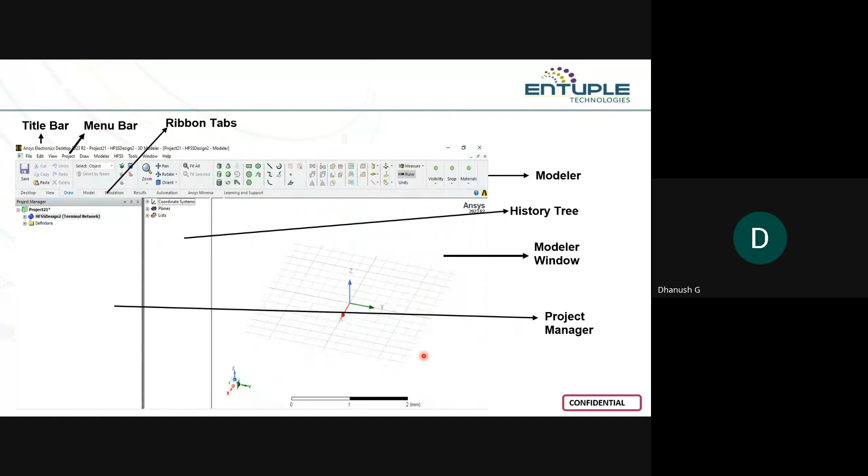This is the Cartesian coordinate system we are using for designing in HFSS. We have three types of coordinate systems, but in this workspace you can see the Cartesian coordinate system.

This is how to create a 2D structure. Coming to hands-on, I'll be showcasing how to create a 2D structure and a 3D structure.

Just click on draw, then you can see the 2D structures—rectangular, circular. These are the 2D structures. We can select from the modeler itself, or you can select from the draw menu. Above the modeler you can see the draw option, right there you can select these options. Otherwise you can select from this modeler option.

I'll be showcasing how to create this rectangle once we enter the hands-on.

Then this is entirely 3D objects. Here just you can click and place into the workspace, then you can see the 3D structures—entire 3D structures there.

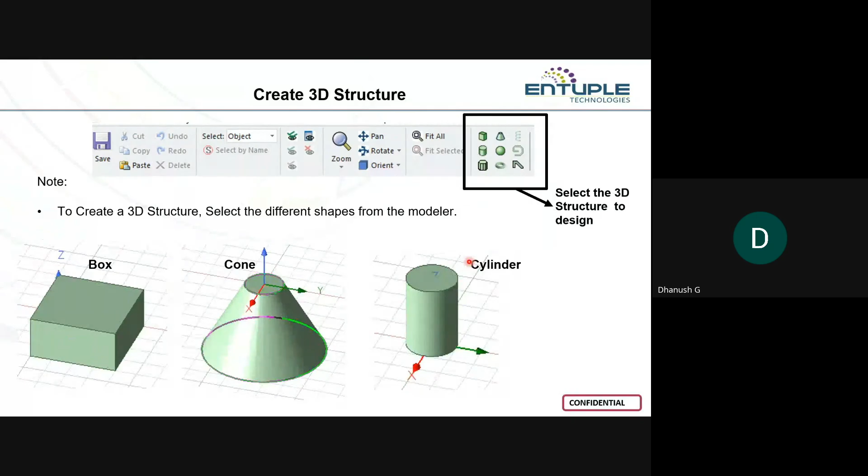Next, you have a very good option in ANSYS HFSS. All users of ANSYS HFSS will know this option—hide selected object in active view, or show selected object in active view.

You can explore these conditions when you are designing very large structures, array structures, phase arrays, or any metamaterial structures. For that time you can use hide selected objects or show selected objects. You can use all these options to create a better design.

First you can see show all objects in active view. You can click this to see all objects active in the workspace. For example, if you create any sphere, any circle, or any 3D substrate, everything will be visualized after clicking this.

If you want to hide something—hide meaning it's not deleted, just hidden—select the structure, like this box, then click hide, and it will be hidden. If you want to visualize it again, you can click this 'show all' option to visualize all hidden objects. This option lets you select only the show-only-selected-object-in-active-view function.

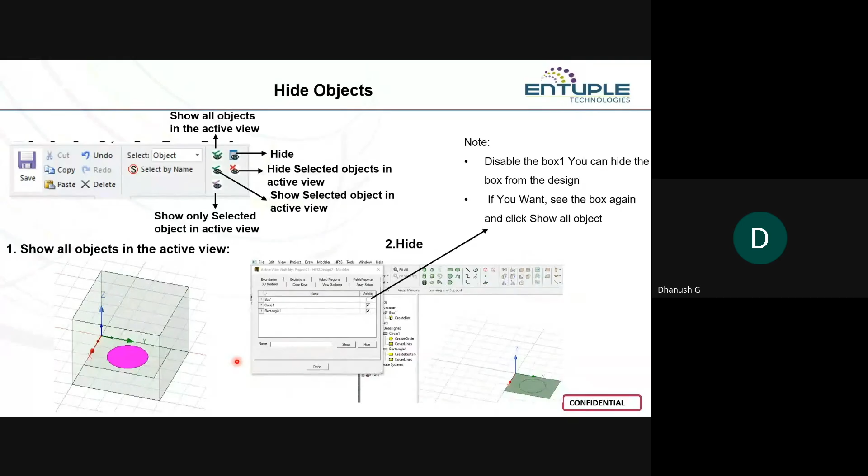You can select one object, then click this option, and you can visualize only that object—others will be hidden, meaning other objects will be hidden. This is what I'll be explaining.

Next, we have the select option. There, if you want to select the entire face, edges, a vertex, or multiple vertices.

We use this option when, for example, you want to assign a boundary condition for all objects—that time you can go with select object all. Just click this, and the entire object will be selected.

When you click face—when you are assigning a unit cell concept, for example, if you want to assign a primary-secondary boundary condition, what we call master and slave—you need to click this face option to assign those kinds of boundary conditions.

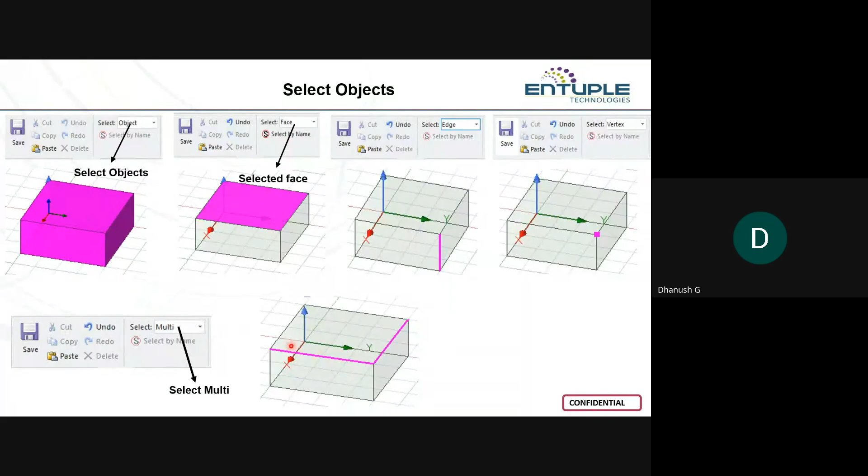If you want to do a chamfer or a truncation, that time you can go with edge and vertex, so you can do a chamfer or truncation. For multiple chamfers or truncations, you can go with the multiple option. This is the select object options available in ANSYS HFSS.

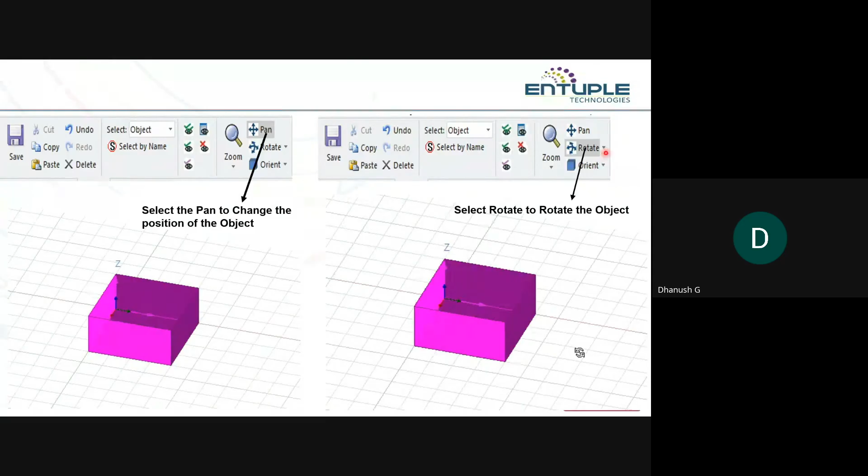Next, this is a pan. There you can change the entire position to change the position of an object for a better visualization. That time you can use this pan. Then you have a rotate option to rotate your design, and if you want to see the back or bottom of your design, that time you can use this rotate option.

Otherwise, we have another option called orient, where you can click just the bottom and directly it will come to the bottom. If you want to visualize all those things like the bottom side of the object, that time you can go with the rotate option. Next, we have an orient option. There you can see top, bottom.

If you want to see the top angle to assign like a port, a Floquet port or a lumped port, if you want to assign only for a top object, that time you can go with this orient option to select top, bottom, right, and all those six isometric views. Then you can go with this orient option.

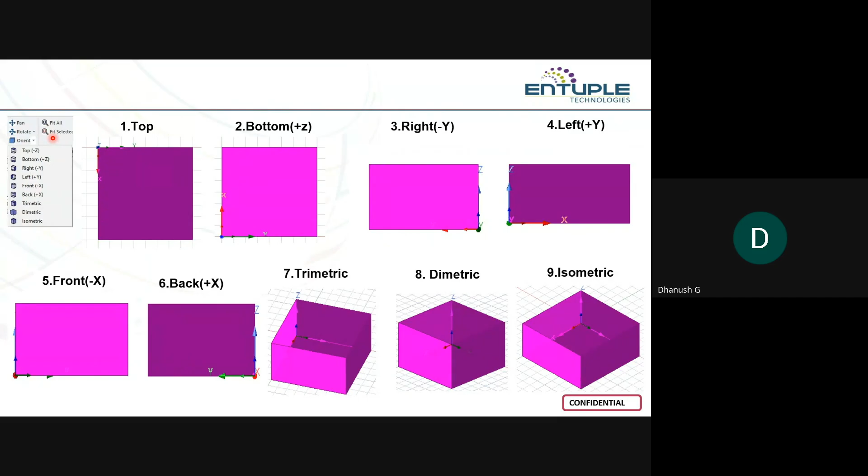Next, these are the shortcuts. Once you become more comfortable with ANSYS HFSS, you can use the shortcuts to fit view, zoom the screen in or out, drag or rotate it. Or if you want to see the wireframe or the entire smooth shaded models, or select faces with clicks itself, all those shortcuts are available. Using the shortcuts, if you consume more time, it will be reduced once you're more comfortable with hands-on.

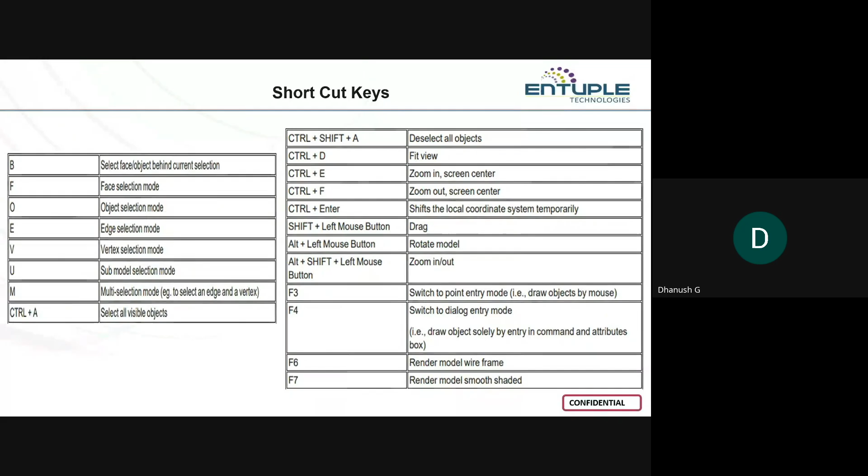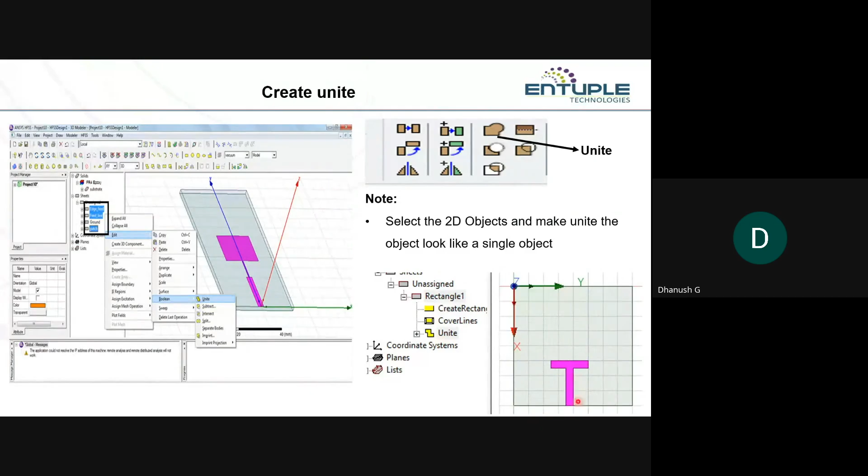This is the unite option. Why we use this unite option is to make all three different objects or components into one. It looks like one. If you want to create this T object, you need to use two rectangles. Then you can select those two rectangles and make that unite.

But that option you can use is this unite option. Next, you have subtract. There, if you want to remove some unwanted space between, or if you want to create a U slot or different slot antennas, then you can use this subtract option to subtract, remove that face, remove that entire space there.

Next, coming to project manager, what are the things you are able to see in a project manager? Coming to model, there you can see geometry structures. There you can create a structure and visualize those structures. Next, coming to boundary conditions, there you can visualize what boundary conditions you have assigned.

Hello. Yes, sir. You can continue.

Next, coming to boundaries, there you can visualize these boundary conditions. For example, if you want to assign a boundary condition to a ground object, then you can visualize the entire ground there. Then if you want to assign the entire complete box, you can visualize the box. All those things you can visualize using this project manager.

Then if you want to see the excitation, meaning the port, you can click on this excitation where it will be assigned. Next, coming to hybrid region, if you are doing any complex designs, then you can use this hybrid region to combine the solvers. For that, you can use this hybrid region.

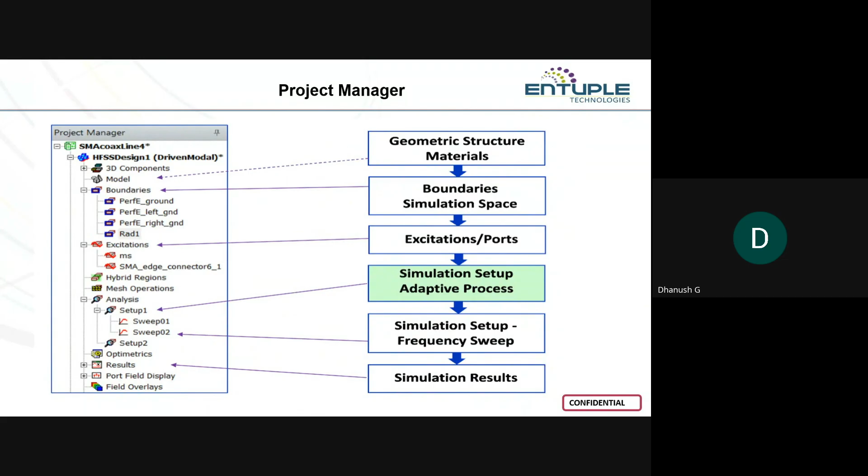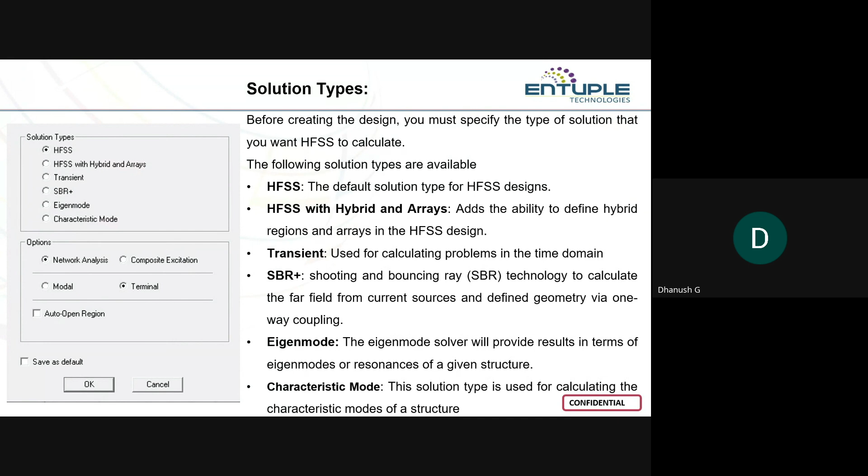Next, coming to eigenmode solvers - if you want results in the form of resonance for a given structure, you can go with eigenmode solvers. Next, we have characteristics mode - if you want to calculate the characteristics of a structure, you use characteristics mode. Next, we have network analysis and composite excitation. Network analysis is the default solution type option we use for normal designs. If you want to do very large complex designs, you can use composite excitation for solving over a large frequency range.

Okay, next, why we use the boundary conditions? What is the purpose of the boundary conditions? It will define the behavior of electromagnetic fields, whether it will be at edges or surfaces, or a computational domain, and it will ensure proper electromagnetic wave interaction within the simulation area.

For a Cartesian coordinate system, the dimension limit is minus infinity to plus infinity, right? For that purpose we'll be using this boundary condition, so it will be simulated inside that simulation area. For that purpose we'll be using these boundary conditions.

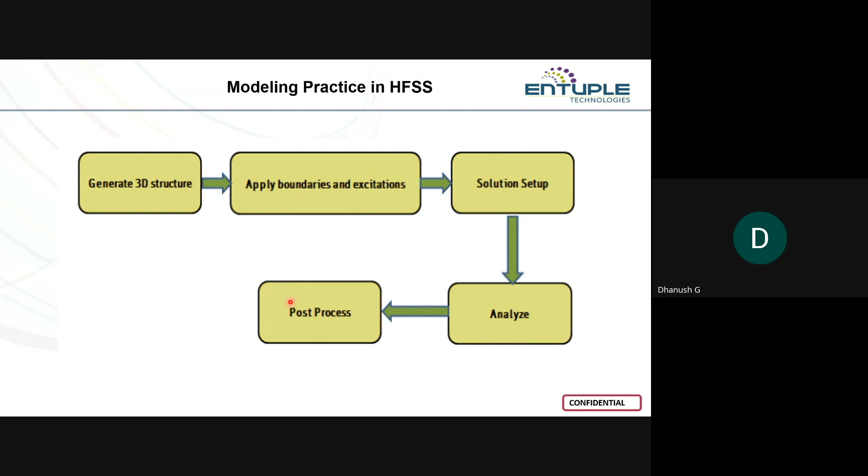After that, you can see post processing. In this post processing part, you can see results like S parameters or radiation pattern. All those things you can visualize in this post processing part. This is the modeling practice we follow in ANSYS HFSS.

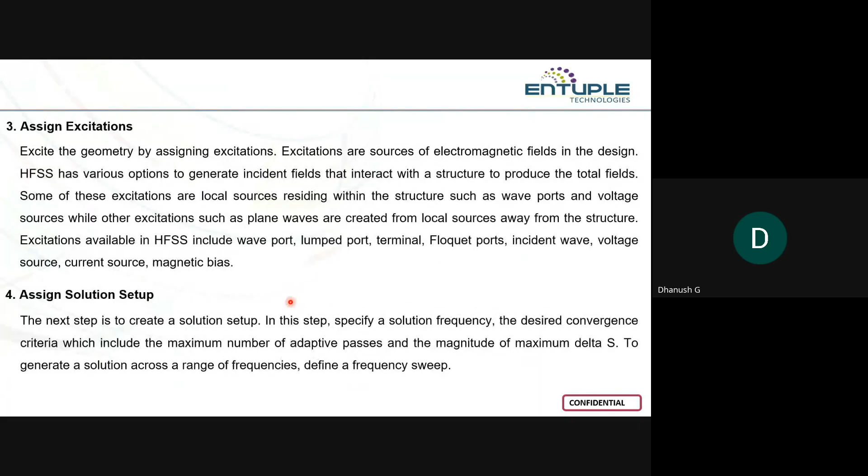Next, what I explained, how to create a geometry, boundary conditions, and excitation, solution setups, and validation analysis and post processing. I explained this process in the day before yesterday's session.

Next, how to create boundary conditions. If you want to assign boundary conditions, click the object, right click on the object, click assign boundary, next click perfect. We have so many options in it, like coupled boundary. If you want to create any unit cell concept, that time you can use this coupled boundary. Next, FE-BI boundaries.

If you want to do a hybrid analysis using FE-BI, that time you can go with this FE-BI boundary. Next, for conductivity, you can go with conductivity boundaries. If you want to do an impedance, then you can go for impedance boundaries. Next, coming to layered impedance or linked impedance.

Then coming to lumped RLC: if you create a structure and want to give values for those resistors or capacitors, that time you can use these lumped RLC boundaries. Next, if you want the entire structure to be a perfect electric conductor, you can use the perfect E boundary condition. If you want magnetic, then you can go with perfect H.

Then if you want radiation on the entire outer boundary, you can use this radiation boundary. Next, if you want PML boundaries, that option is also available; click on it and go further with the PML setup wizard. These are the boundary conditions available for your designs.

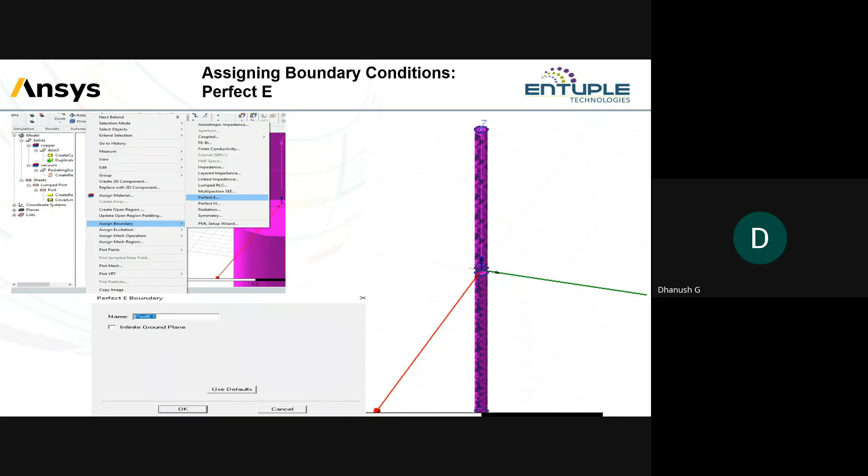Next, coming to excitations, how to create an excitation. For example, if you want to give current for this port, you can select this face, right click there and assign excitation. Then click port, and you can see the circuit port, Floquet port, lumped port, and wave port.

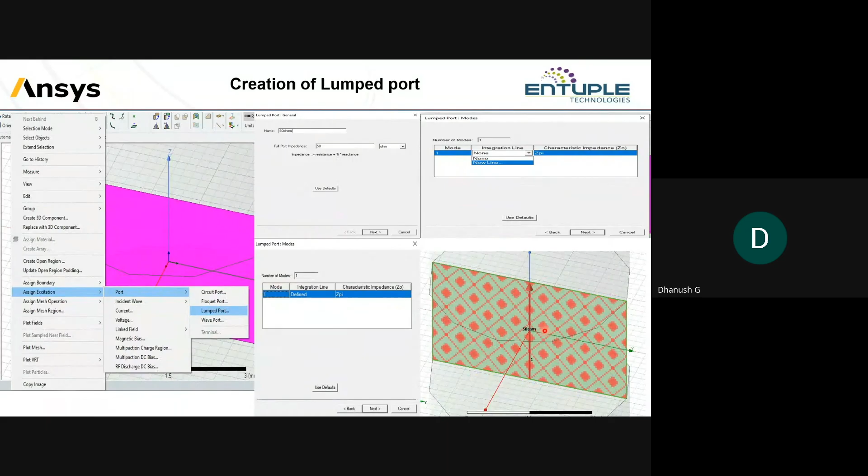If you are designing band pass filters kind of things, you can go with a wave port. If you are doing lumped port analysis, go with a lumped port. If you are going with any unit cell concept, you can go with a Floquet port. If you are using circuits like lumped RLCs, you can go with a circuit port. These are the excitations available in ANSYS HFSS.

Next, this window appears once we click on this analysis. There you can add the advanced means if you want to assign operating frequencies and number of passes, in the sense number of iterations, how many iterations you want to do in ANSYS HFSS to get accurate results. That time you can use this number of passes.

Next, maximum delta S, it's a scale value, if you want to assign that there. Next, if you want to do a dual band analysis or broadband analysis, that time you can use this multi frequencies and the broadband option. Then you can assign your frequencies there. Next, click on this auto. You're able to see this sweep option.

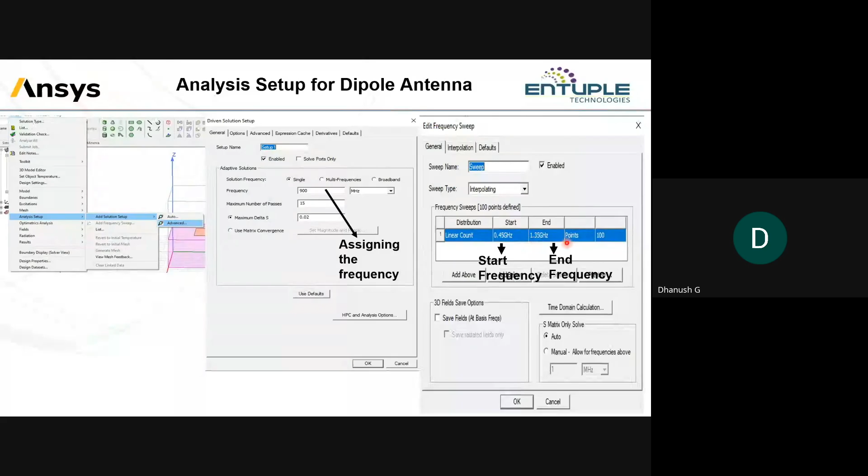We have three types of sweeps. I'll be explaining in further slides. Once I'll be stepping to hands-on, there I'll be explaining fast, interpolating, or discrete sweeps. We have three types of sweep type: discrete, interpolating, and fast. There you can assign a start and stop frequency. It's a scale value.

Next, coming to analysis, there you can see this analysis part. Coming to a validation check, if there are any errors, it will be showing in that validation part itself. Then if there is no error, you can go with analysis.

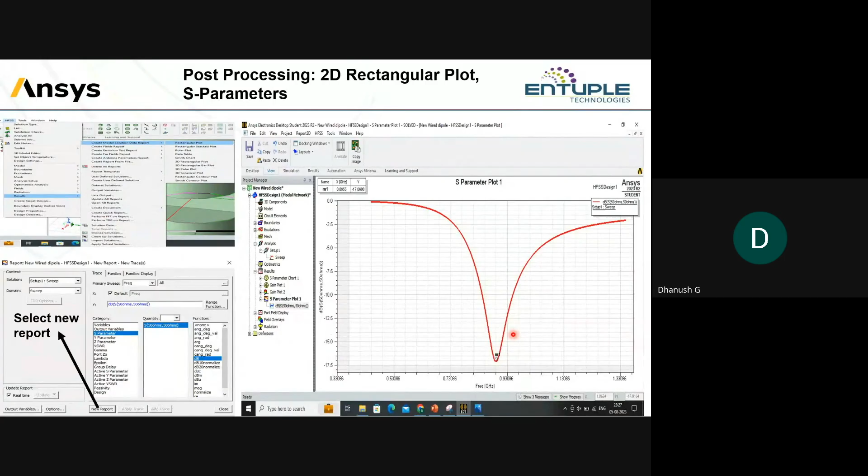And these are the post-processing 2D S parameter results. I'll be showcasing how to get these results in a hands-on session. These are the results we can expect from ANSYS HFSS. These are the major results we are looking into. Next, we have a gain plot. This is a radiation pattern.

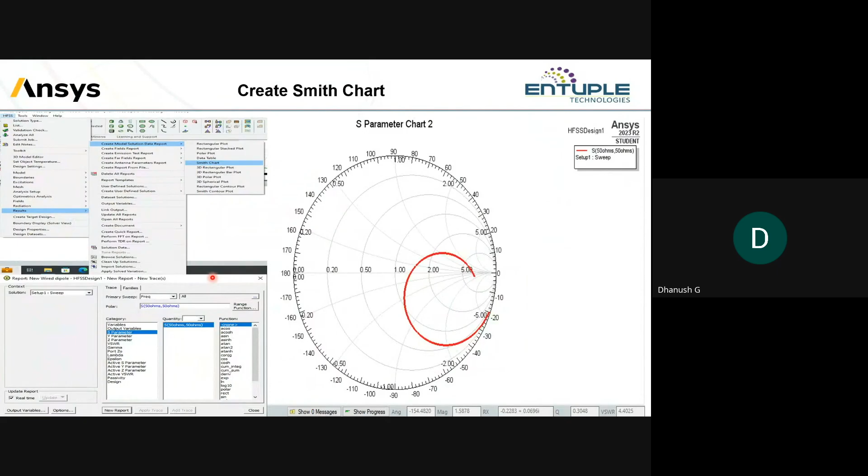And next, we have magnetic fields. I'll be showcasing how to animate this in a hands-on session. This is the entire animated magnetic field structure. And if you want to check the Smith chart, then you can use the Smith chart tool, and you can visualize the Smith chart, and you can do impedance matching using the Smith tool.

Thank you. I'll be coming to hands-on now. Any doubts, you can interrupt me and ask me your doubts.

Sir, you mentioned that. Sir, your voice is breaking, sir. Sir, can you explain all the things? Yes, yes. No, sir. I will ask that, sir.

Yes. Okay, sir. This is what I explained in the entire GUI. This is a project manager, this is a history tree, this is a modeler, this is a title bar, and we have some components here. There you can see you can do an EMC analysis. There we have set up standards, and next, if you want to do a SAR analysis, then you can go with the human phantoms there.

We have some RF simulation parts, like if you want to take SMA connectors, female SMA connectors or male SMA connectors, that time you can go with this RF component, and we have some inbuilt circuits in it. All those things are available in this part. If you want to do ADAS, that time you can see the vehicles available in it, and all those things you can visualize. You can take an entire model and do a simulation there.

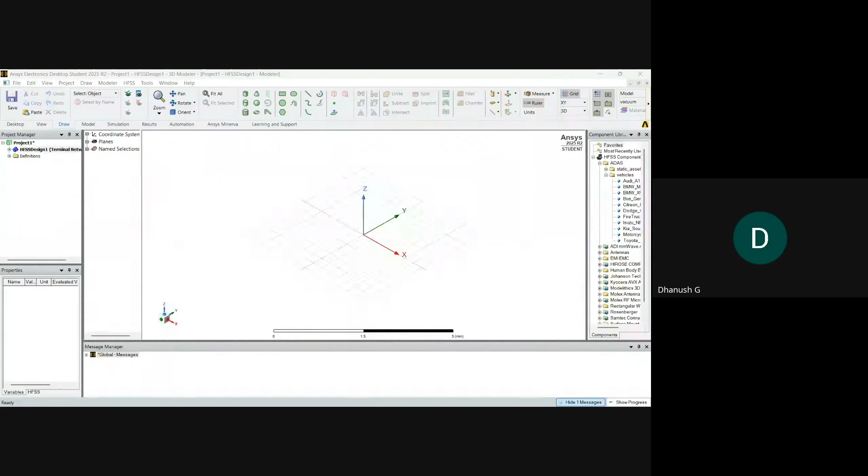Or if you want to do satellite communication, that time you can use this microstrip patch. And for radio communications also you can use this. Or for telemetry in missiles, you can use this microstrip patch. Next, biomedical radiation, for example, if you want to do SAR rating analysis for your phone, or MRIs or cancer detection, all those things you can use this microstrip patch.

Why? Because we're using FR4. FR4 dielectric material is easily available in the market. For that purpose, the fabrication cost is very low, and it's very easy for mass production. Why? Because it's only a single structure. For that purpose, it's very easy for mass production.

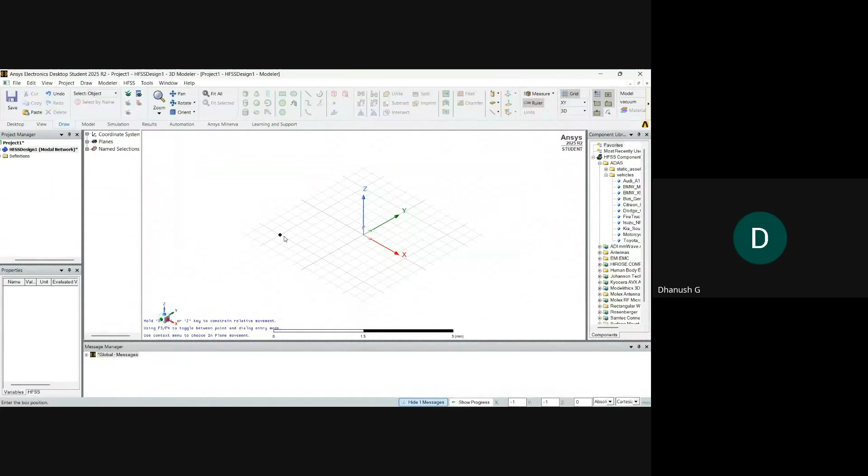First, I'll create a substrate. For that, I'll take this box. This is a 3D box. Remember, for 3D, three clicks. For 2D, two clicks. First, select this box somewhere on the workspace. Why? Because you know the dimensions, right? So you can create your box somewhere on the workspace.

Click once and drag. Click one more time, that's the second click, and take it up or down. Then click a third time. It will create a 3D box. Okay, now the box is created.

If you want to change the name, the material or the dimensions, you can double click on this box to change the name and the material. If you want to change the dimensions, you can double click on this create box.

First, I'll change the name and the material of this box. I'll double click on this box one. Now you can change the name. I'll change it to substrate.

Next, I'll change this material. Select this material, edit. I'll be selecting FR4. I'll search here for FR4, and select this FR4 material. Click OK. Now the FR4 material will be assigned.

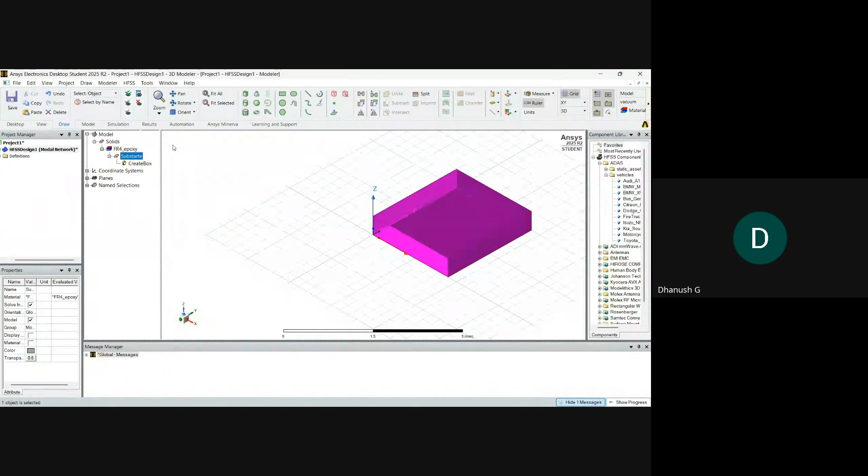Next, if you want to change the color or transparency based on your requirement, you can change the color and the transparency. For better visualization, you can change the transparency also. Just click OK, apply and OK. Now the name, the material and the color have changed, and the transparency also changed like this.

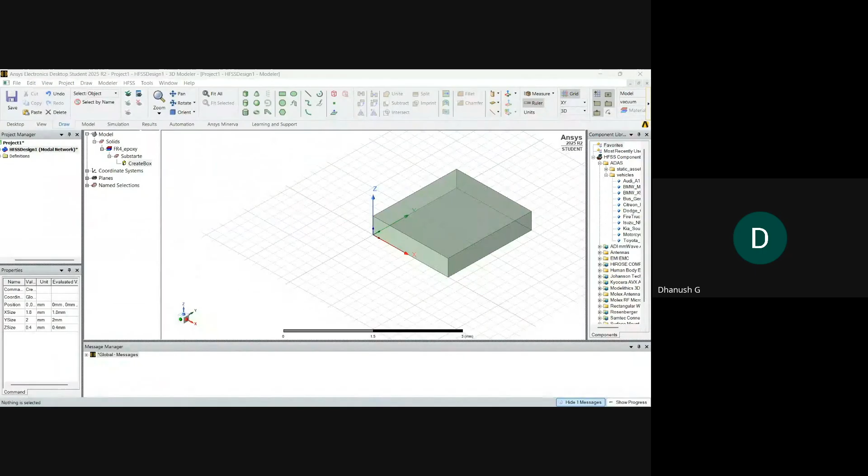Now I'll double click this box. In this position, I'll assign the coordinate system position, then the X size, the Y size and the Z size. For the position of the substrate, I'll assign -25, -25, 0. This is the position in the XYZ coordinate system, and X size is 50 mm, Y size is 50 mm, and Z size is 1.6. Z is nothing but the height of the substrate. Then I'll click apply.

Now the entire substrate will be created. Now I need to create a patch. For that, I'll be using a 2D rectangle. This is a 2D rectangle. I'll just click on this and draw wherever you want. You can draw anywhere, because we have the dimensions. For this 2D object, you need to click two times. Click 1, drag like this and click 2. Now the rectangle will be created.

You need to rename this rectangle. For that, I'll double click on this rectangle and rename it as patch. If you want to change the color, you can change it based on your requirement, then the transparency based on your requirement. Click OK. Always use light colors when you are working with large structures.

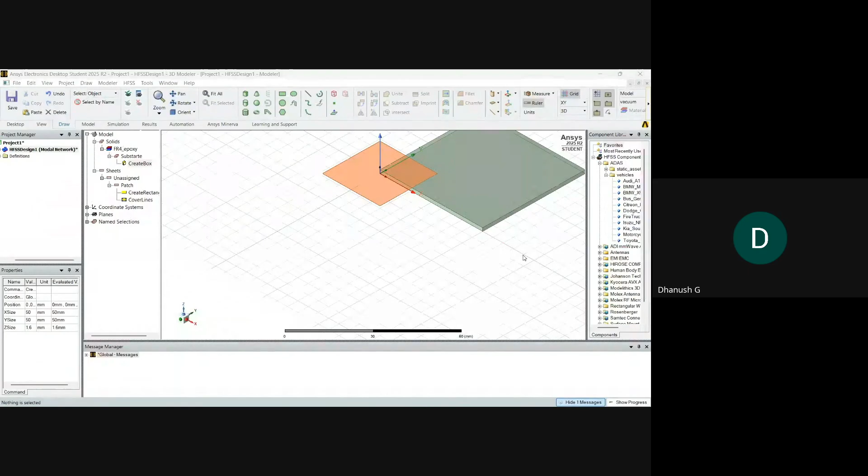Now I'll assign the dimensions, meaning you need to double click on this create rectangle, then enter the position. We already have some positions. I'll enter -14, -14, 0. And here this is 2D, right? We have only x and y. So x size is 28, y size is 28. Somewhere we missed here. I'll paste it. Oh, sorry. Now it will come into position. I'll press Control D to fit all.

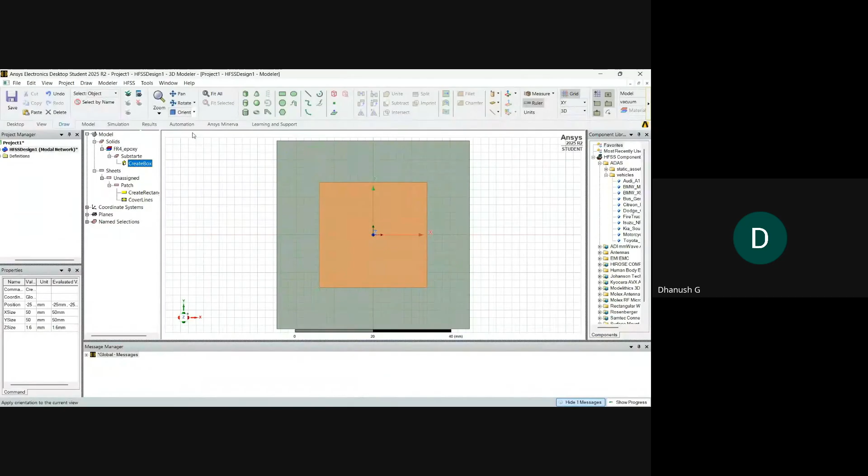Next, if you want to see the top view, select this orient and click on the top view. Now you can see the top view, right? If you want to see the bottom, you can select bottom. If you want to see the right, based on your requirement you can select it. If you want the normal view, just click on this orient. Now it will come back to normal.

Next, I'll be creating a ground plane. For this, I'll take a triangle. Sorry, rectangle. Then I'll draw from exactly where the substrate starts. Just click here, then end where it ends. Now the ground creation is done. If you have dimensions, you can click on this create rectangle. The dimensions are correct: -25, -25, 0, and x size is 50, y size is 50.

Sir, we are unable to see the values you are entering, sir. All the structure is visible, but after pressing create rectangle a window will open, no, sir? We are unable to see that window, sir, whatever values you are supposed to enter. Okay. I'll stop and present again.

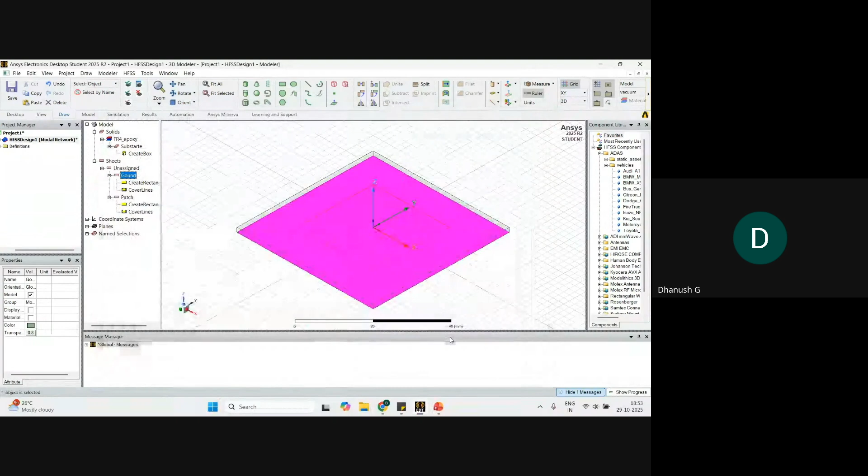Okay, now I'll create this ground plane. Select this rectangle one. I'll rename this as ground. If you want to change the color based on your requirement, you can change the ground color. And if you want to increase the transparency, you can click on this transparency. Click OK. Click apply. Now it will be renamed as ground. You can see this object. This is the entire ground and this is the patch.

Now I need to create a transmission line. First, I'll create one quarter wave line. I'll be using this rectangle. I'll create it somewhere on the workspace, just like this. Why? Because I have dimensions. So I'll rename this as quarter wave. If you want, you can change your colors. Just click OK. Next, coming to the dimensions, I need to click this create rectangle. Then I'll change the dimensions.

The position is 23 mm, minus 0.25, comma 0. Next, x size is minus 9 mm and y size is 0.5. Apply. Click OK. Now this line is created. This is the quarter wave transmission line. After this, I need to create one more feed line.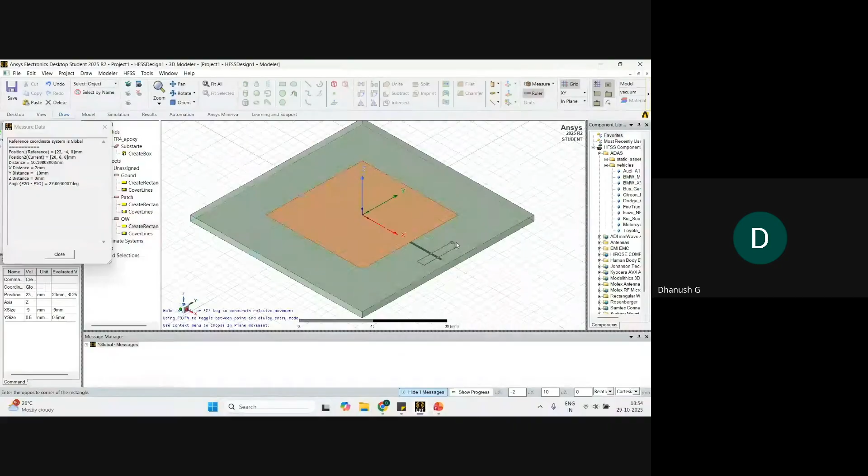Now I need to create one more feed line using this rectangle. I'll select this rectangle and draw somewhere on the workspace. Then I'll rename this as feed line. If you want to change the color, you can change your colors, otherwise let it be. Next, create this rectangle. Then you can add your dimensions.

The position is minus 25, sorry, plus 25, comma minus 1, comma 0. And x size is minus 2, y size is 2. Apply. Okay. Now, able to see this? The feed line is created. After this, I need to do the unite.

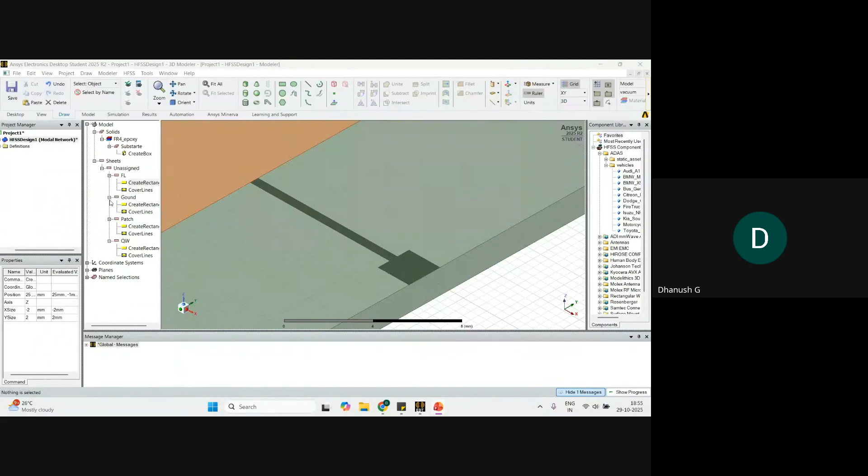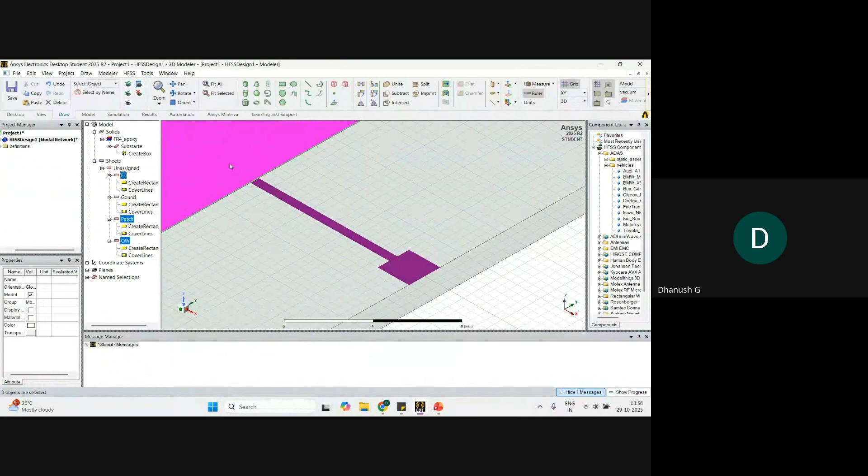First, I'll select the patch. I need to make these 3 different components a single object. So I'll select this patch, quarter wave, and feed line. Then I'll select this unite option. Click on unite. Now all 3 different components look like a single object. There is no gap here. It is a single object now.

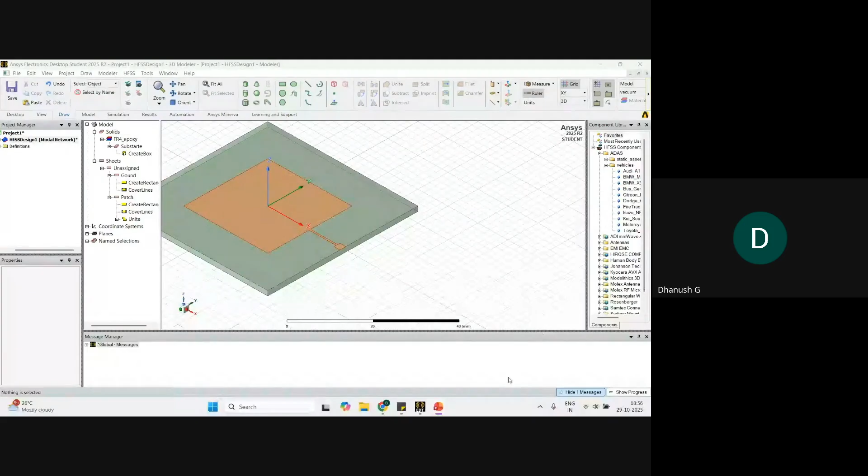Now I need to create a port here. This is a different grid and this is a different grid, so I need to change the grid. In the modeler, you can see this option called grid. There I'll select the drawing plane, then change to YZ or ZY. You can see the difference here. The entire grid is changed.

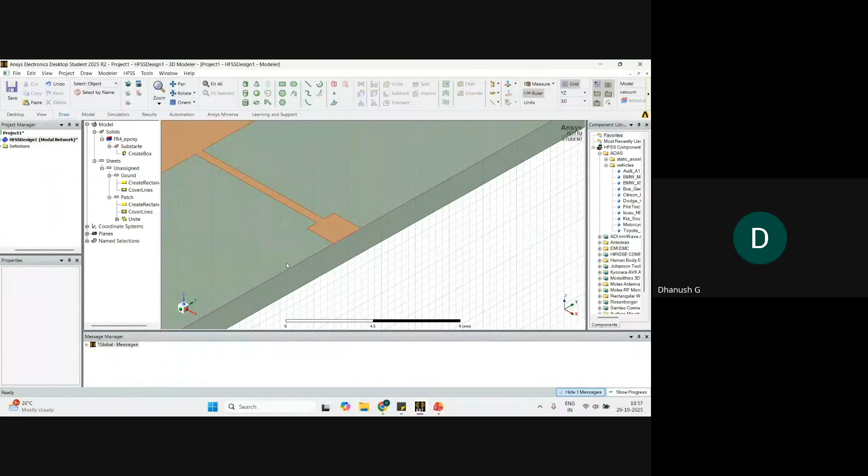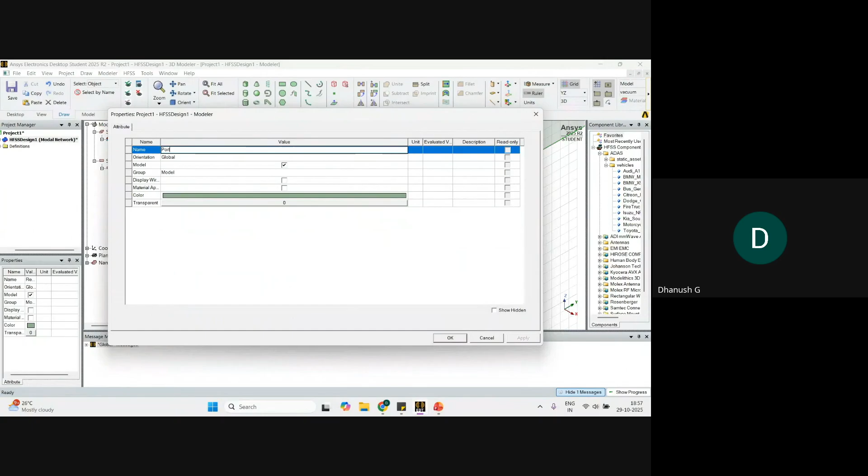So I'll take the rectangle again and draw a rectangle. For rough dimensions, I'll draw somewhere on the workspace, but I need to rename this as port. Click OK. Then if you have dimensions, you can enter them. Otherwise, you can draw a rough structure. I have dimensions.

So I'll select this port option. Then the port rectangle is highlighted. I select this, right click on the workspace, and you can see assign excitation. Click on assign excitation, then port, lumped port. Now the port impedance is 50 ohm. If you want, you can change the port impedance there. Next, coming to the integration line, I'll select new line.

Then I'll draw from where you see the triangle. It indicates the center of your bottom port edge, the center of the rectangle from the bottom. Once you see this triangle indication, drag it up. Then again you see this triangle, which indicates the center again. You can assign it wherever you want; it should give a direction. The current direction is bottom to top. Then it's defined. Click on next.

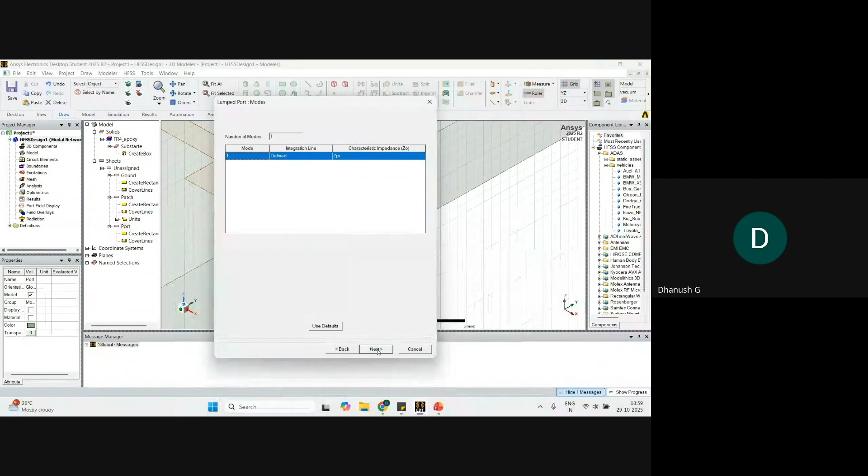If you want to change the modes, you can enable this. Otherwise, you can go with normalize.

Click finish. Now the port will be assigned. Go to the project manager, click on this excitation, now click on this one. Now the excitation will be created.

Sir, where do we use lumped ports and where do we use wave ports? If you want to design any filter kind of structures, you can go with a wave port. If you want to do normal designs like antenna structures or arrays, you can go with the lumped port itself. So based on your project requirement, what you want to achieve, for example, if you want more parameters or a large structure, you go with a wave port. It depends on your structure.

So can you explain with some examples, sir? For example, when you are creating bandpass filters or RCS designs, like radar cross sections, radomes, or stealth applications, you can go with the waveports. If you are creating normal antennas like microstrip patch antenna, Yagi, bowtie, or monopole antennas, you can go with the lumped port. If you want to do a unit cell concept or phased arrays, you can go with a floquet port. If you are doing any metamaterial structures, you can go with the floquet port.

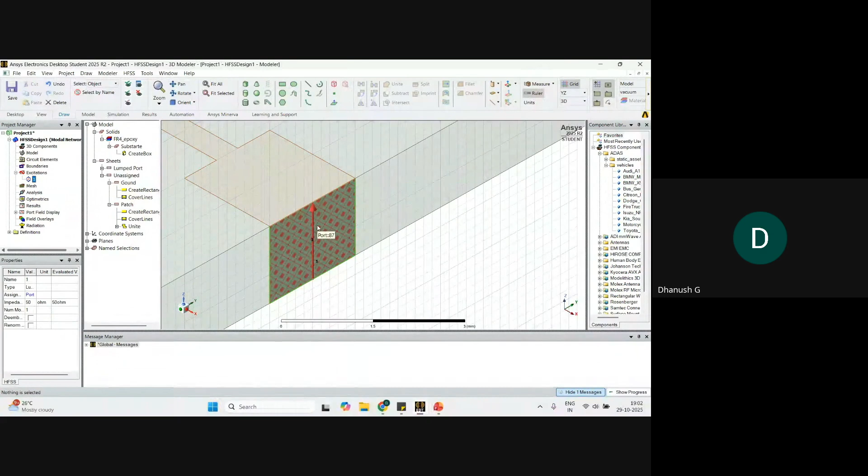So can we also do the modal analysis in the normal patch? Yes, if we don't want to know about the current direction, in that case can we use a wave port or lumped port with microstrip? In microstrip you can use a waveport, like if you will be doing an array, you can use a waveport also. Only if we want to know the current direction for large array structures, then we go for terminal. Why we are using this microstrip, to check return losses and all, for that purpose we want to check the electrical field distributions inside the structure. For that purpose I'll be giving the current directions. Like if you want to do TE and TM mode, you can use this line current direction. If you want only TEM mode for the entire structure, you can go with normal terminal options.

Okay, for coaxial cables, right sir? For that one also, you can use lumped port. Yes. Okay sir, thank you sir, thank you.

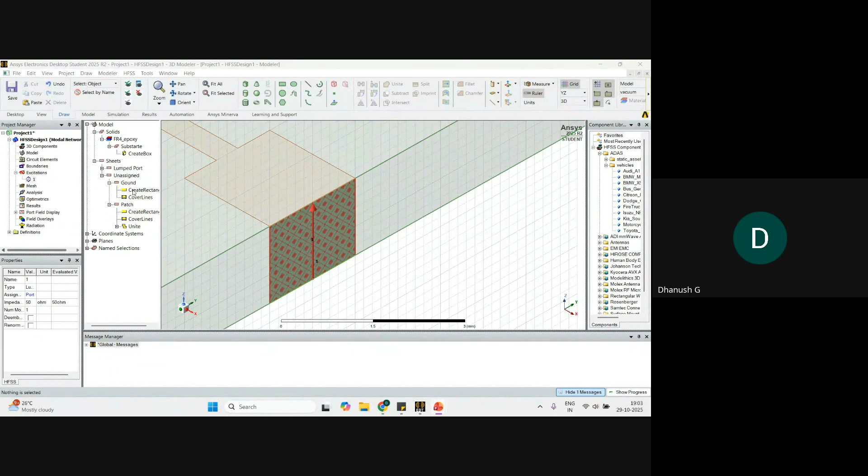After assigning this excitation, now I need to assign boundary conditions. So I'll select this patch and ground. Select patch, right click on the workspace, assign boundary, Perfect E, next, click okay. Now the perfect E will be assigned, perfect electrical conductor will be assigned for this patch structure. Now I need to assign for ground also, so I'll be selecting assign boundary, perfect E.

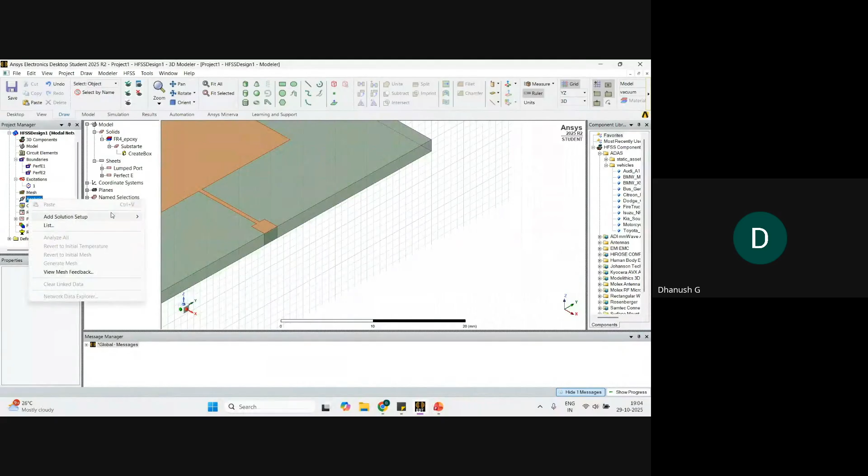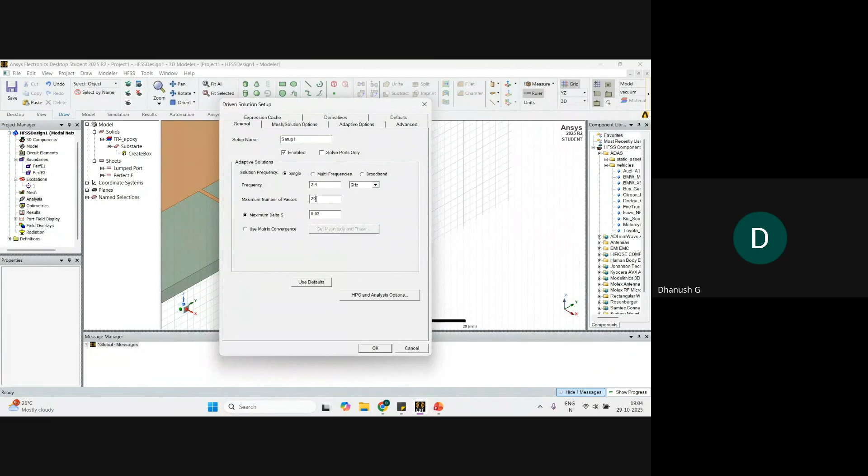After assigning this boundary condition, now I need to assign the operating frequency. So after this, I just click on analysis, add solution setup, advanced. Here I'll be assigning my operating frequency. In this frequency, I'll click on 2.4, this is my operating frequency for this microstrip patch antenna. Based on number of iterations, it will give more accurate results, so I'll be changing number of passes, number of passes I'll make it 20. It will take some time based on number of passes, also the simulation time will be increased. It's the number of iterations, how many iterations you want to do for this structure to get accurate results. Based on your requirement you can give this number of passes. Then I'll click OK.

Sir, I have some doubts. Where do we use multi-frequencies and broadband? Are you doing any dual band application?

In case of reconfiguration and all, we use multi-frequencies for that time. Yes, that time you can use a multi-frequency. If you are doing any dual band application, that time you can use this multi-frequency and the broadband options.

For broadband, sir, if we go with continuous frequencies like wideband, that type of applications, you can go with broadband for Wi-Fi applications or Bluetooth applications.

That time you can go with broadband. And if you want to do multi-frequencies for reconfigurable, if you want to assign multi-frequencies, to see how your structure will behave for multi-frequencies - for example, I need to check results for 2.4 gigahertz and 3.6 or 5.2 - that time you can go with multi-frequency options.

Okay sir. Next, this is sweep. There you can see the sweep types - discrete, interpolating, and fast sweeps. We have only three types of sweeps.

Coming to discrete frequency sweep, you use it if you want to solve using the adaptive mesh at every frequency. The field will be generated at all points at the specified frequencies in the sweep. For that type, you go with discrete sweeps.

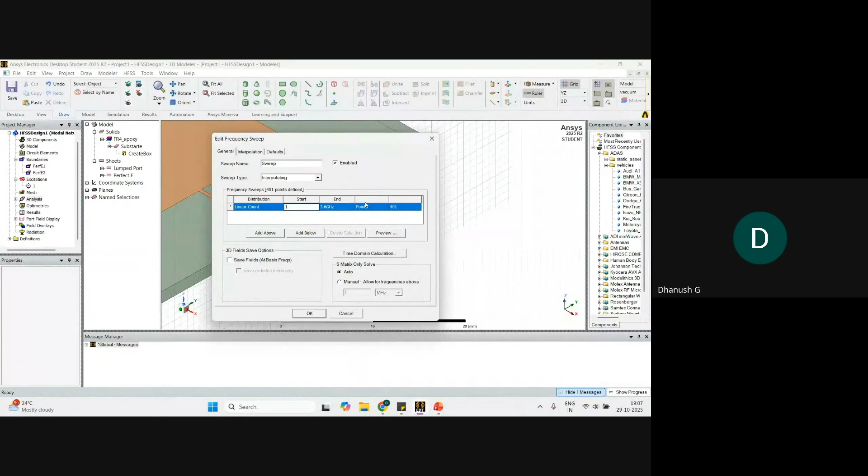Okay, I'll be using interpolating sweep conditions. I'll start frequency from 1 and stop at 3. Click OK. Now I'll be assigning frequencies.

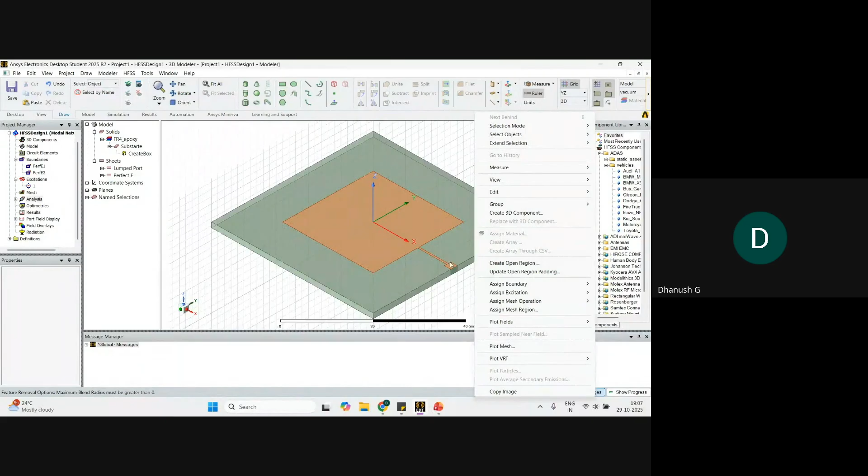Now I need to create a radiation box. I'll right click on the workspace. I'll be creating an automated radiation box - right click on the workspace and create an open region based on my operating frequency.

It will be created using the lambda by 4 values. So right click on the workspace, then mention the operating frequency. The boundary condition will be a radiation. Then click OK, and the entire radiation box will be created.

If you want to change the values of the radiation box, go to the history tree, click on the vacuum and change the radiating surface. Then you create regions, and then you can change the values - we change it to 20.

If you want a manual way, you can create it using a box, then create structures. For example, I'll showcase here itself - I'll select this box and create a box, assign the dimensions for that. Then you can make this a radiation boundary using the assigning boundary options.

Excuse me sir, small doubt sir - here there's the option, no sir, PML. So where to use the PML and where to use the open region, sir? Can we use open region for all kinds of projects, sir?

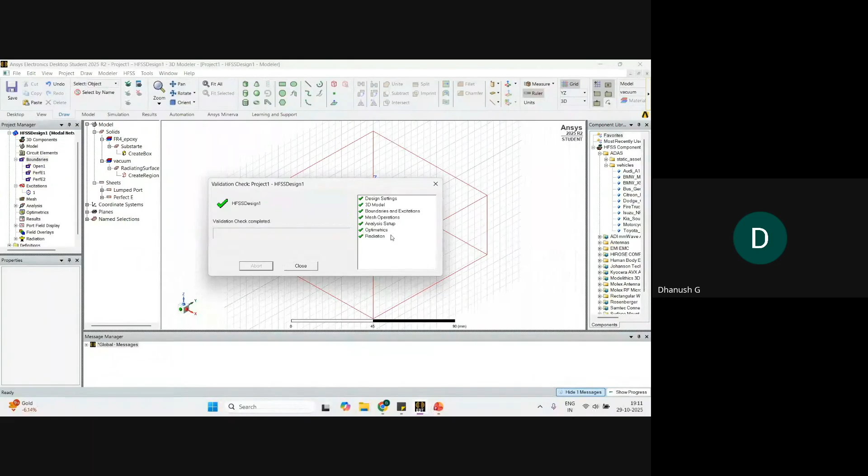And Optimetrics - no, I didn't do any Optimetrics. Then I'll assign radiations, then click close - everything will be correct. Next, I'll go for analysis. Now I need to save the file with a name like microstrip patch.

MP selected. Save. Now the process will be going on.

The simulation process is going on. It will take some time to solve this entire design - about 2 to 3 minutes to solve. Based on your system configuration, if you have a high-end system, it will solve faster. The entire thing depends on your system.

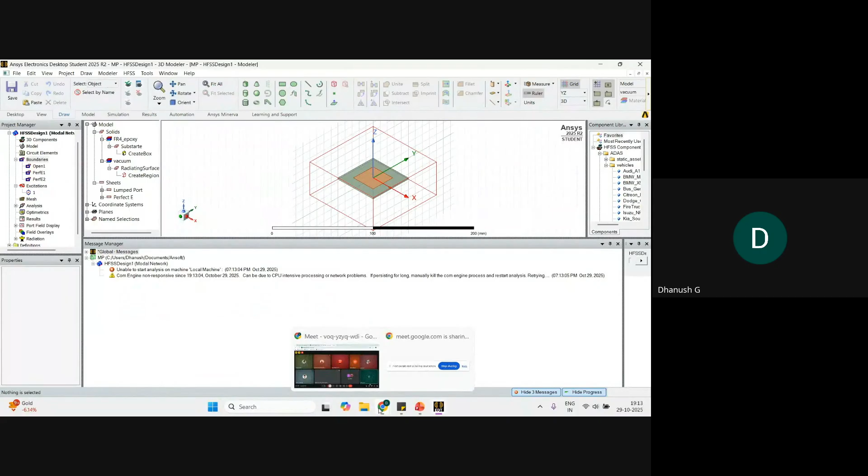Sir, a small doubt. In your session, ma'am said that while going with any kind of design, don't just go blindly - go with the reason for choosing the type of material, and go with the electrical length for choosing any kind of design. Yes sir, okay, first start with electrical length.

So how to proceed with that, sir? For any kind of frequency, for example GPS frequencies or 2.4 gigahertz frequencies - how to consider and start proceeding with the design? How to consider the electrical length, and how should I first choose material based on that, and calculate the operating frequency for what operating frequency you are calculating.

Then you can go with our normal theoretical calculations. Once you're able to get the perfect patch length and width, you can go online - we have so many calculators. Just type microstrip patch calculator, EM calculator, or EM Talk calculator, and there you can calculate your patch length and width. Based on that you can go with your designs. It completely depends on the user, for what application and frequency you are working with - you need to do background work for those things.

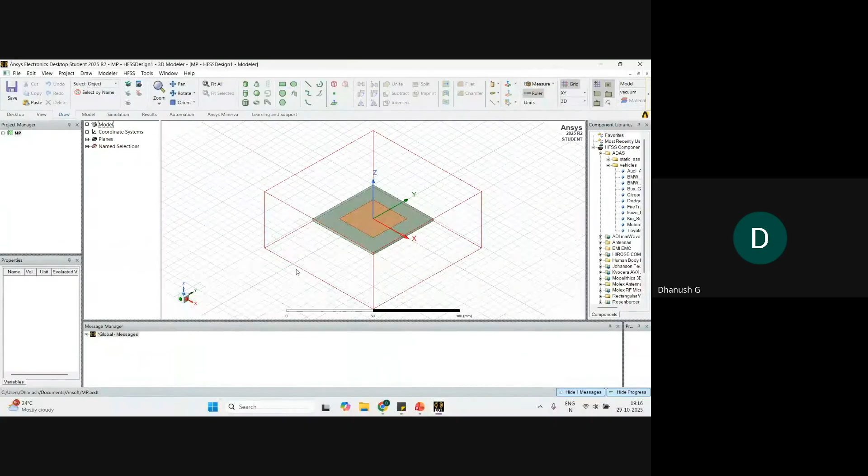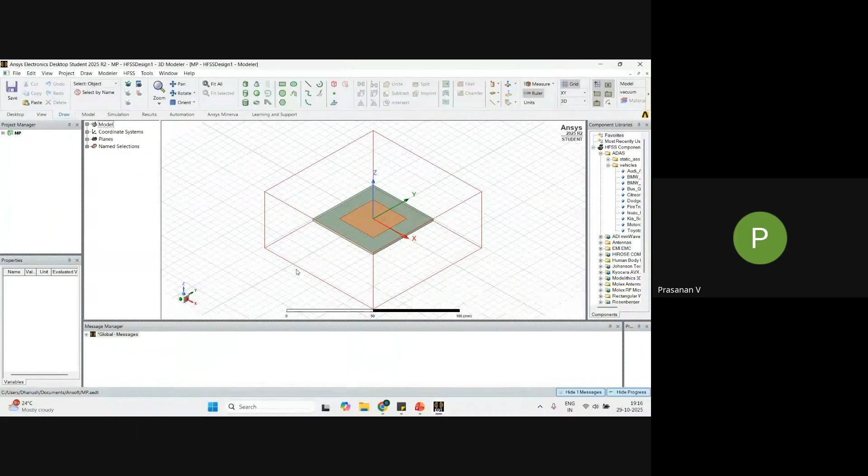Okay, sir. For bandwidth improvement, sir? For bandwidth also you can go with the length and width, based on your project. I need to check what you are doing and where you are concentrating. All those things I need to check, then only I can suggest where and which setting you need to do. Okay. So there is no proper procedure, we have to check both the length and width? Yes. Okay, sir.

One more doubt, sir. Tell me. For example, if I design a patch using an EM calculator for 2.4, I got patch dimensions of 25 into 25, sir. So how to estimate the size of the substrate and the ground? Is there any relation?

I'll be suggesting one book for you. There we have entire formulas to calculate substrate and quarter wave dimensions, everything using formulas. Then you can calculate the substrate of the patch, then do some trial and error methods. All those things you need to play with in the tool itself. You can refer Antenna Theory by C. A. Balanis, chapter number 14. There you can see the microstrip patch and the formulas.

There we are finding formulas for length and width of the patch, sir, but I am asking for ground and substrate. Substrate also, there we have some formulas based on your patch length. It should be doubled. For example, if you are using 25 mm length of patch, it should be doubled, like 50 mm. Okay, substrate length is doubled, 50 mm.

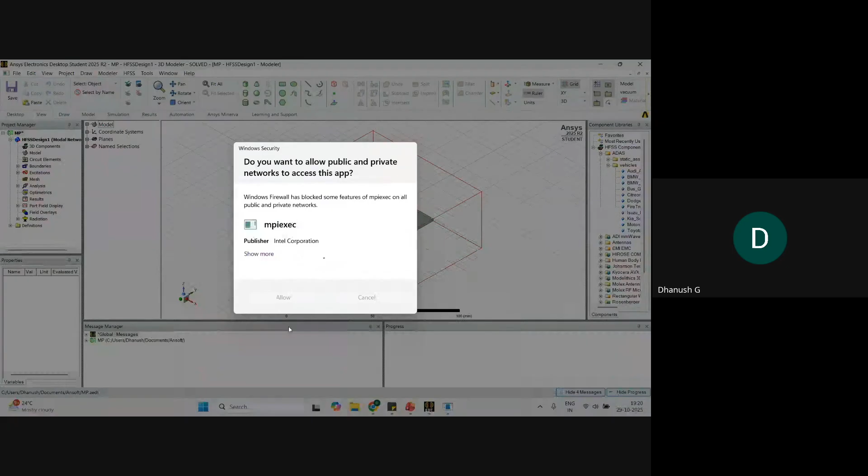Give me a minute, I think it will take some time to analyze. Able to see my screen, right? It will be analyzing, this is the progress. It will take 2 to 3 minutes, it depends on the system. It's for security purposes, so it will ask for permission.

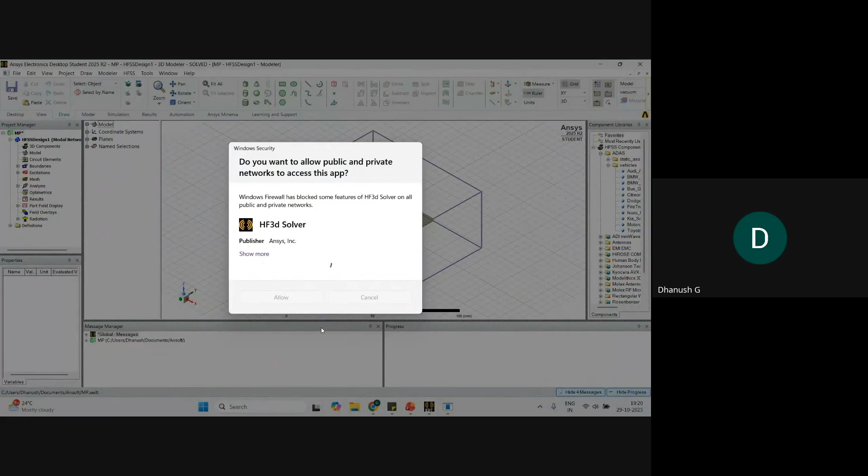Now the simulation is completed. First, I'll be showcasing S parameter results. Just click on results in the project manager, otherwise go with HFSS, there we have a results part. Results, create modal solution data report, then rectangular plot. Select S parameter quantity S11, function dB, then click new report.

This is the entire S parameter result. This is the operating frequency where the results will be, and how many dips there are. That you need to analyze; once you are more comfortable with theory, you can analyze it very easily.

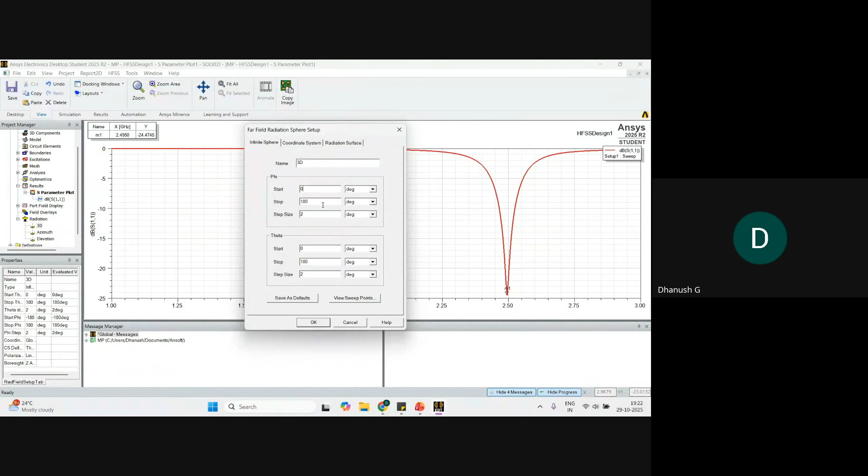Next, if you want to check the radiation pattern, first I need to add the 3D far field radiation setup, available in the project manager. Expand it, click on 3D, then enter the phi start and stop values, and theta start and stop values. Click OK. Now go to results, right click, create far field report, 3D polar plot. Then go with gain total, function decibels, click new.

The entire structure is a 3D gain plot. If you want to visualize a 2D gain plot, just click on create far field report. Click on radiation pattern, gain, go with gain total, function is decibel. Then I need to select only 0 degree and 90 degree values. So I'll click on families. I just click on the phi value, all, then I'll be selecting 0 degree and 90 degree. Using control, I need to select these 2 degrees.

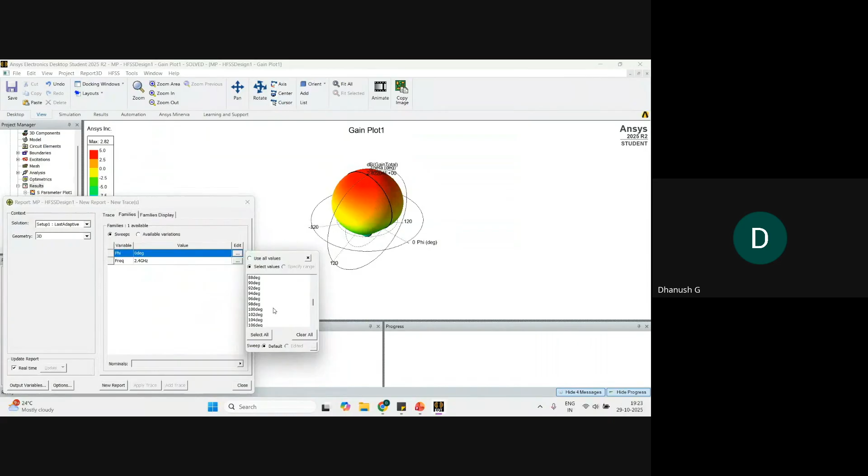Then click new report. You're able to see this green and red color. This red color indicates H plane and green color indicates E plane. Okay, this is a gain plot.

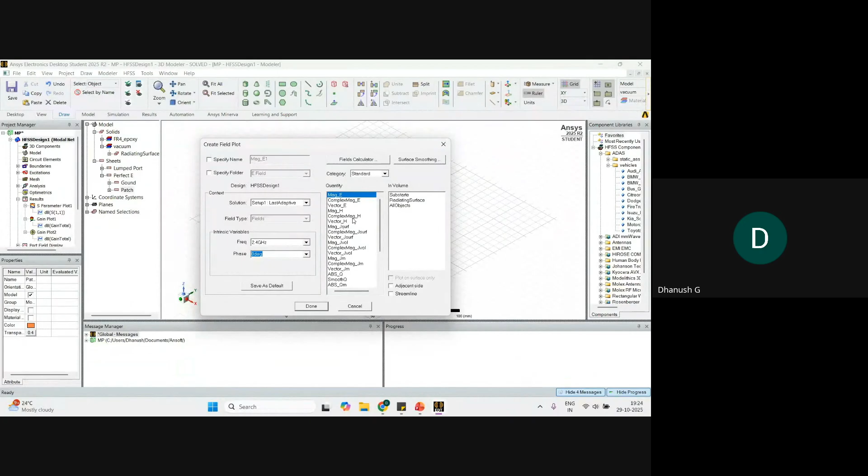Then I need to do electric field distributions. I need to hide this radiation box. Just hide it. Select the patch, right click, plot fields, E field, select mag E. Then no need to select anything. Just go with done. It will take some time to solve it. And look at the top view.

Then if you want to animate, go to field overlays, click on this plus, click the expand option, E field expand, select mag E1, right click, click on animate. You're able to animate the structure, and you can see how it will be distributed in the entire structure. This will be the field distribution inside the structure. If you want to see the entire thing, select all objects, and you can see how the electric field will be distributed across all objects.

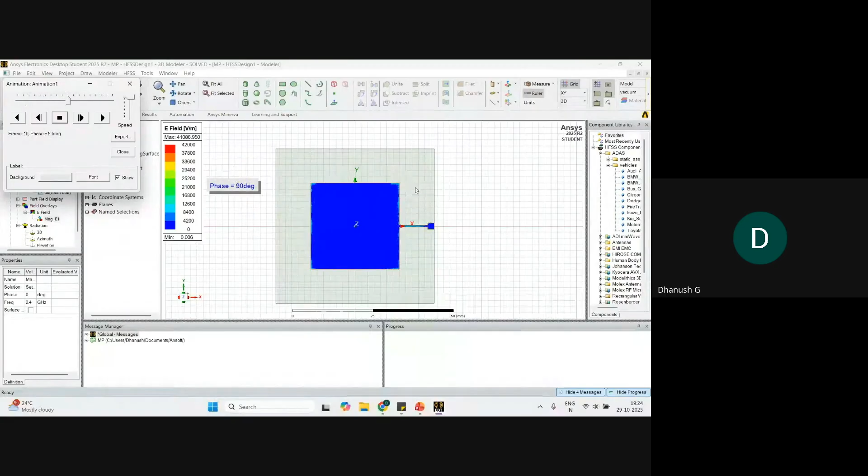Then if you want to visualize the E field showcasing vectors, select vector E. I need to select the geometry first. Plot fields, E vector, click OK. It will show the results in vector form. Just click on this vector, animate. Now it will animate, showing how the electric field is distributed in vector form. This is the way.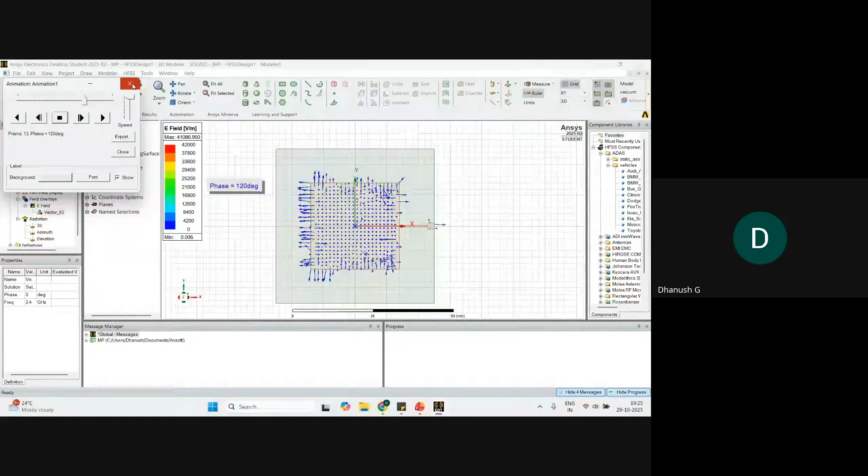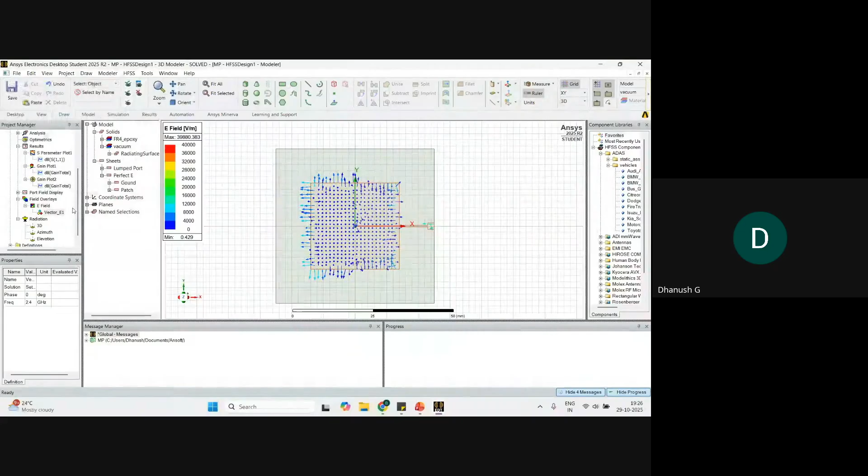I have only five more minutes left to go with the metamaterial, so I'll do the metamaterial design tomorrow. I'll showcase the metamaterial designs and the results we're expecting, and I'll cover the bandpass filter. And tomorrow I'm planning to showcase specific absorption rate and how to import a human phantom. In the next session, I'll showcase how to make an array using this antenna structure itself. In 5 more minutes, I'll be showcasing how to create an array for this.

Now, select all. This is how to create an array. We have options to create arrays here, but this is the manual way to create an array, like 4 by 4 or 8 by 8 arrays. Those are simple steps I'll be showing. If you create a large structure, you can enable this option for large structures, then go with the creation. For this design, I'll go with the normal manual way.

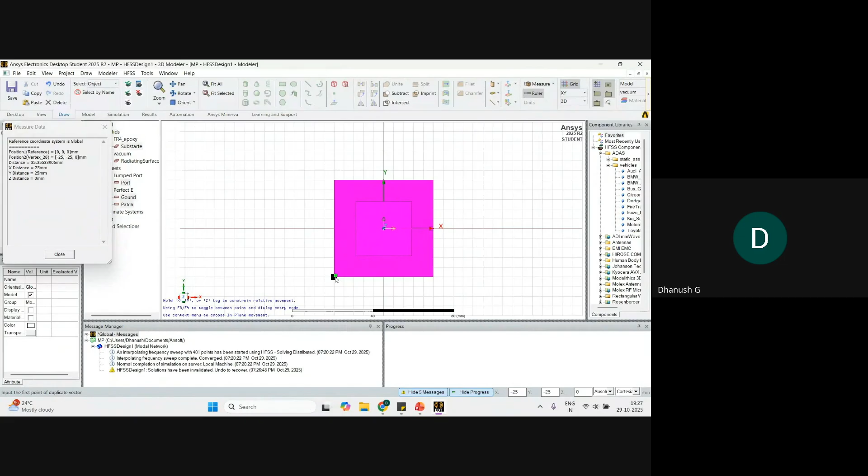So I'll select all, right click on the workspace, edit, duplicate, move along the line. I'll click when it's at the corner. Once you're able to see the square there, it indicates the corner, and I'll drag and drop like this. Now the total number of objects is only 2, so it will be created.

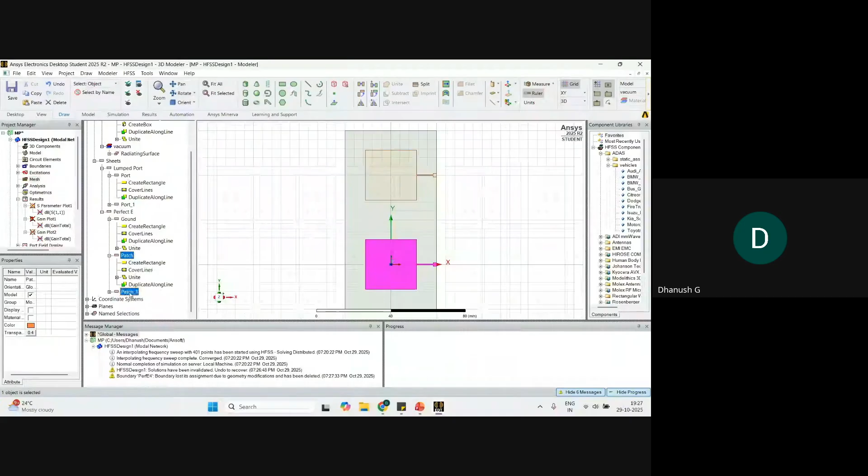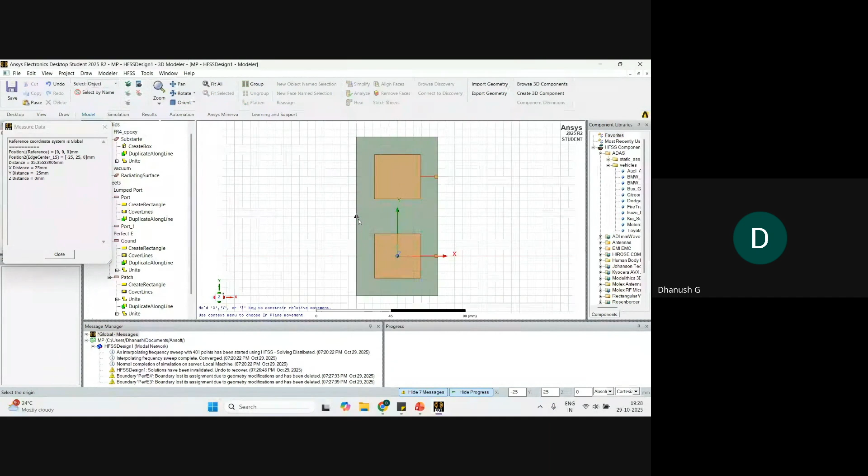Now I need to make this a single structure. I need to unite the substrate and substrate one to make a single substrate. Next, I need to unite ground and ground one to make a single ground. Next, unite patch and patch one to make a single patch. Before going further, I need to create a coordinate system here. Go to modeler, coordinate system, create relative CS, offset, to create a different coordinate system. Once you see this triangle, it indicates the center of your structure. Click on it. Next, I'll select all.

Select all. I click on the workspace, edit, duplicate, around axis. Then I need to click 180 degrees. Then I'll go with X or Y. Just click OK and cross-check whether this is correct. No, this is not correct. So I need to select Z itself.

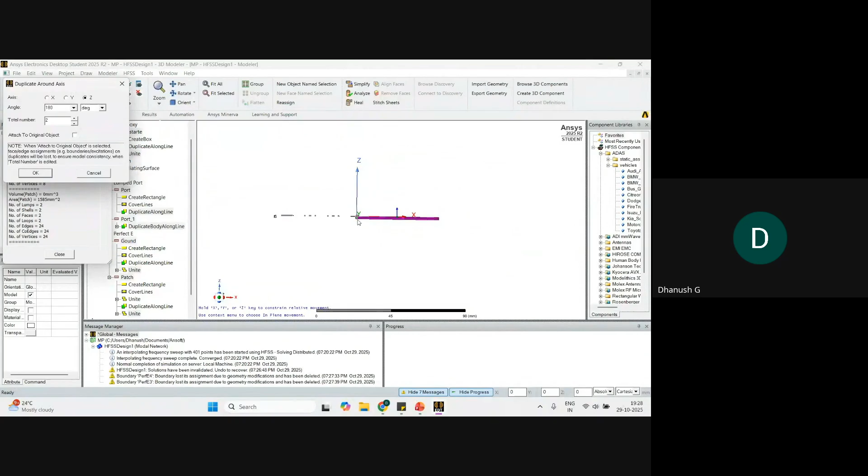Edit, duplicate, around axis, Z axis. Sorry, if we make a mistake while creating the coordinate system, it will be wrong, so it will give this error. I will delete this coordinate system and create it again. I need to create it at the bottom of the structure. So go to the modeler again, coordinate system, create relative CS, offset. Then I need to create it here at the bottom.

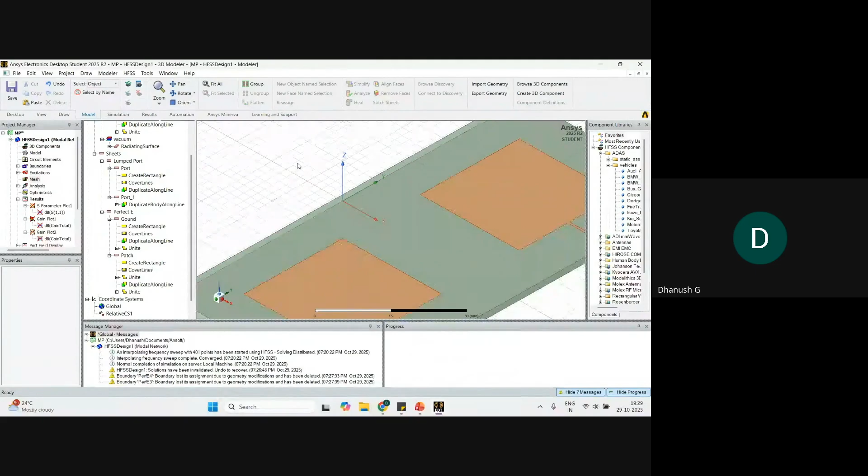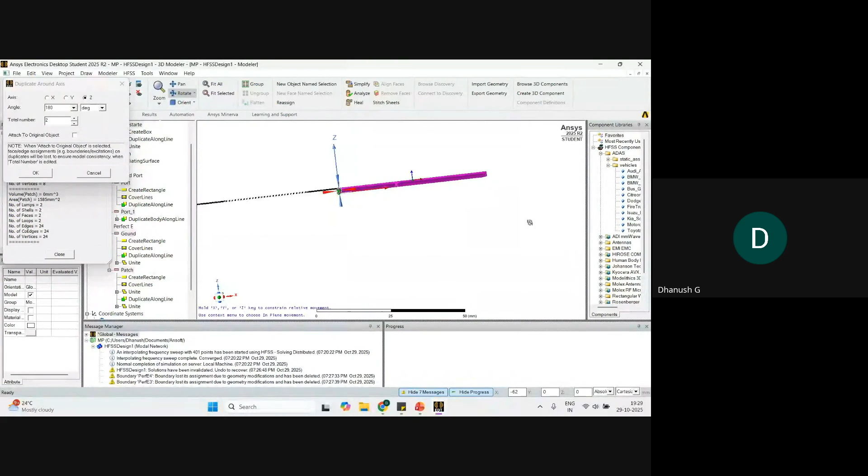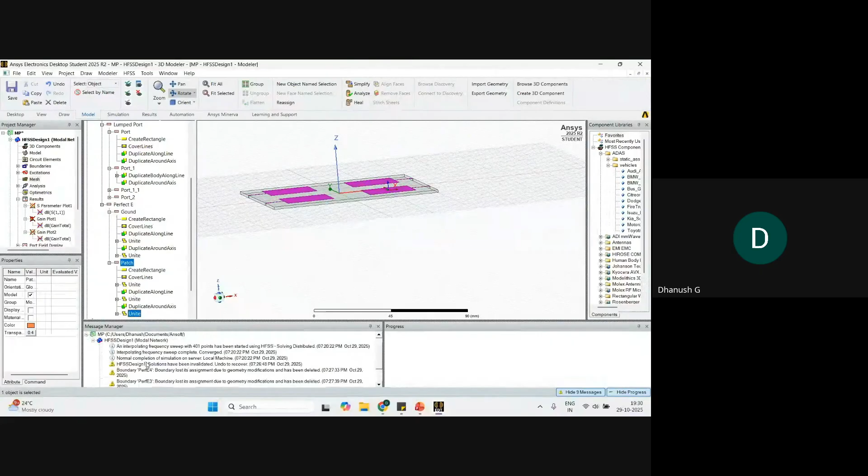So again, I need to unite to make a single structure. Unite the structure and unite ground 1 and ground 2. Just unite it. Next, unite the patch. Now the patch is also united. Okay, all boundary conditions will be assigned here.

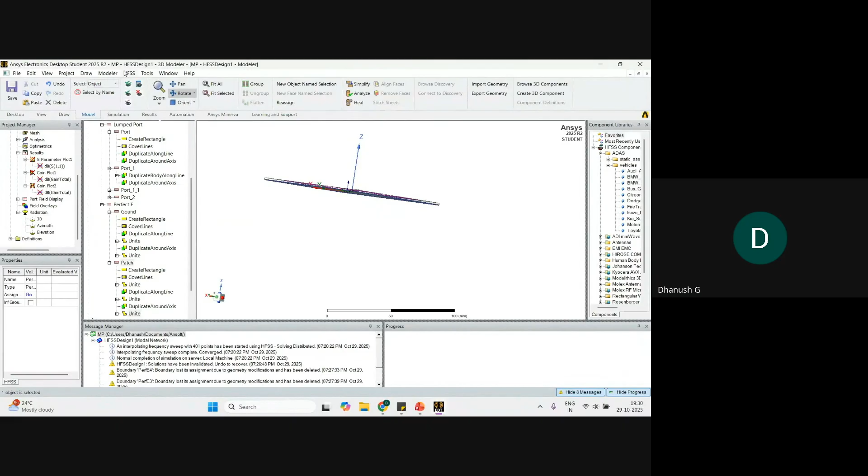Now, if you go for analyze all, I'll do this 2 by 2 array for 2.4 gigahertz itself. Everything will be created in the microstrip patch only; I'm just showing how to create an array. There is no error in this microstrip patch antenna array. This is a 2 by 2 array. Go to analyze all. It will take some time. So for today, we'll stop here, and I'll showcase the results tomorrow.

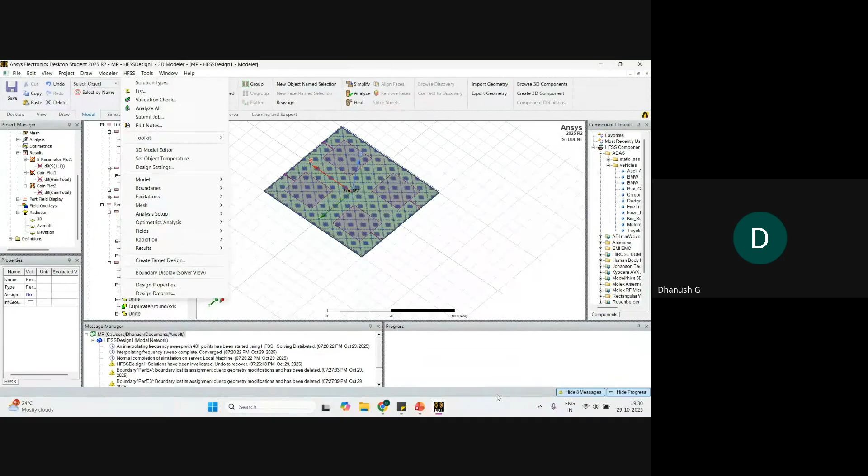And if you want to give power to a single antenna, only for this single antenna, that option is also available. Only for this or this or this. You can give power to a single antenna to check how it will behave, like active or passive elements, in an antenna array structure. All those things you can visualize, like assigning the current, whether you can turn these patches on and off. I'll be showing this in tomorrow's session.

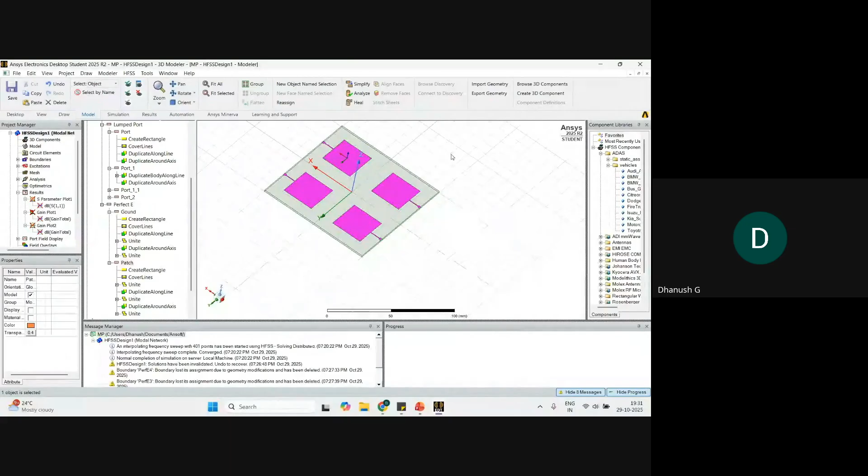Sir, I have a small doubt. Yes, madam. For all the 4 patches, is the port given separately or the same port? Separate, madam. We need to give all 4 ports. Okay. So what is the difference between array and MIMO antenna? Compared to a normal single patch, we use an array to improve the gain of the structure. For that purpose, we use array structures, like a phased array.